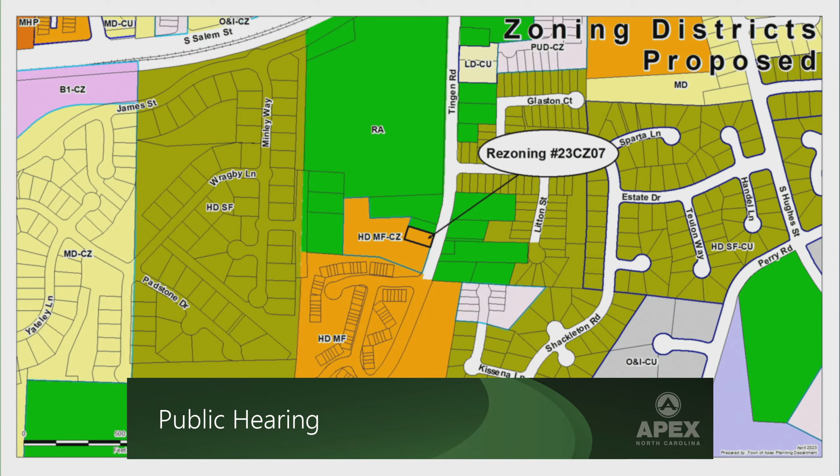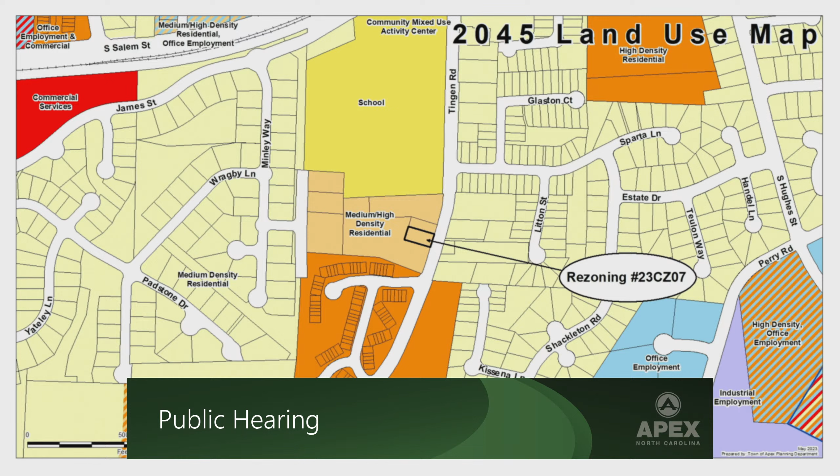The property is currently zoned residential agriculture. The applicant is proposing to rezone to high-density multifamily conditional zoning. The 2045 land use map designates the property as medium-high density residential. The proposed rezoning to HDMF is consistent with the land use map. The applicant conducted a neighborhood meeting on March 30th.

This rezoning was exempt from meeting with the Apex Environmental Advisory Board since the proposed rezoning is less than 1 acre. A full list of the uses and conditions can be found on page 2 of the staff report.

The applicant is proposing townhomes. I would like to point out that the zoning conditions are all the same as the adjacent rezoning to the south, except for condition number 11: the property shall be developed with the adjacent property to the south.

Planning staff can recommend approval because the proposed rezoning is consistent with the land use map classification and will expand the area available for affordable housing and encourage compatible development. Myself and the applicant are here to answer any questions you may have.

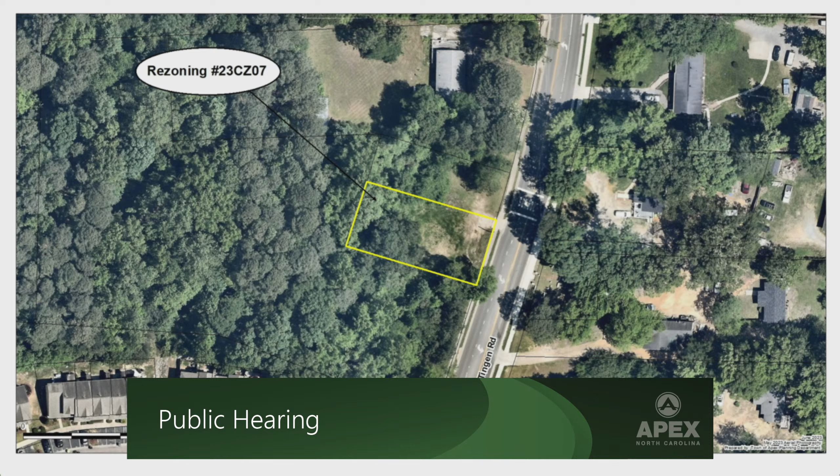Liz, I want to clarify one thing you said. You said staff can approve? Is that right, are you agreeing? Okay, yes, thank you. Any questions for Liz?

Does the applicant want to speak?

Good evening, Mr. Chair, members of the Planning Board, Jeff Roach, Peak Engineering and Design. Good to see you guys today. I'll be real quick here. This is exactly what we told you we were going to do in December.

The property owner was going after this 0.2 of an acre piece. He has now acquired the property, and we've already submitted the master subdivision plan for 100% affordable housing development on this piece, along with the 2.2 acres next door. So it will be a Habitat for Humanity, White Oak Foundation, something like that, that does pure 100% affordable housing.

So we followed staff. We are basically delivering on a discussion we had back in December with you, as well as the approval on January 10th from Town Council to support the project. I'm here tonight just to answer questions and tell you we're doing exactly the same thing that's happening next door, and we're back to say we did it. We acquired the property. So with that, I'll open up to any questions.

Yes, sir, Mr. Akers. Where are you at in the process with the parent tract, like without this?

We actually included this tract in the master subdivision submittal process. We made our submittal on May 1st for the master subdivision plan, and we'll get our first round of comments back the end of this month. Assuming it's approved here and approved by council the end of the month, the master subdivision and CDs will continue through the process.

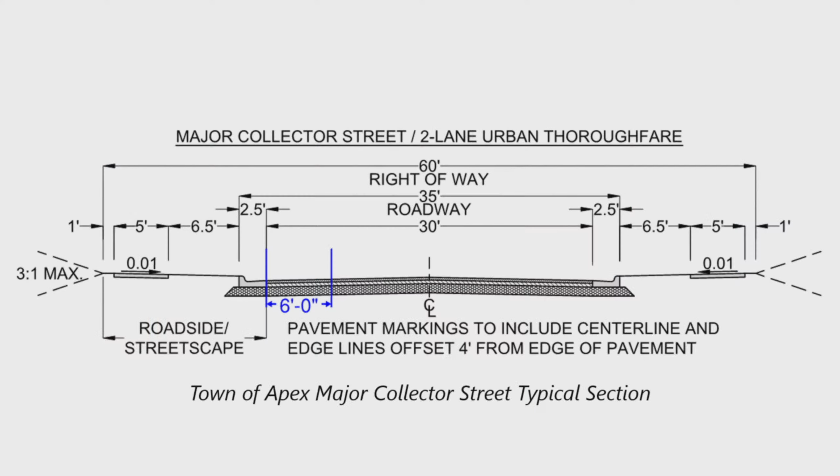Just to give you a visual of what's being asked for, this is the town standard. What's already been approved is removing the sidewalk here and this 2.5 feet of curb and gutter, and now what's being asked for is to remove this additional 6 feet. This line gives you an idea of how much more uneven that is over here.

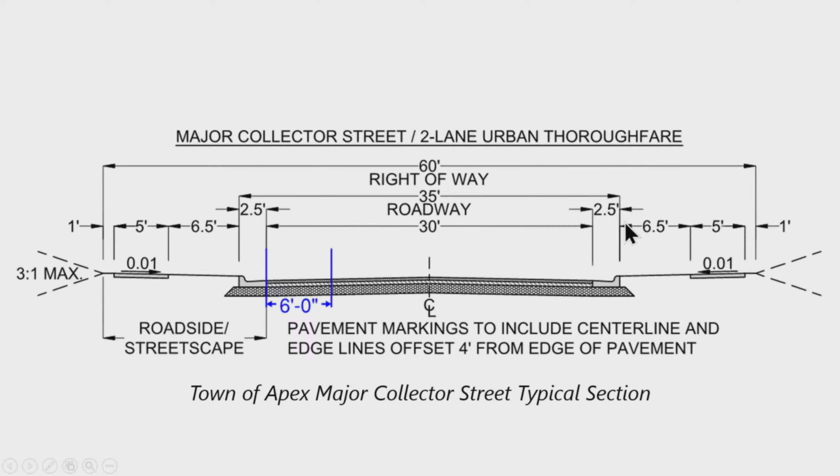The next proposed request is to increase the maximum allowed length of a branching cul-de-sac. The UDO already allows 2 cul-de-sacs sharing 1 point of common connection to be 1,200 feet long. The applicant, due to concerns about connectivity elsewhere, is asking for that to be increased to 1,450 linear feet. Staff doesn't have a problem with this.

There are no connection options to the south because of Army Corps land, and no way to connect to the east because of the American Tobacco Trail. There's also environmental stuff to the north that means they can't provide a stub street, so this will give them a little extra flexibility. The UDO section being called for is the one that gives flexibility in case there's an environmental feature that can't be crossed. Staff has no concerns about this one.

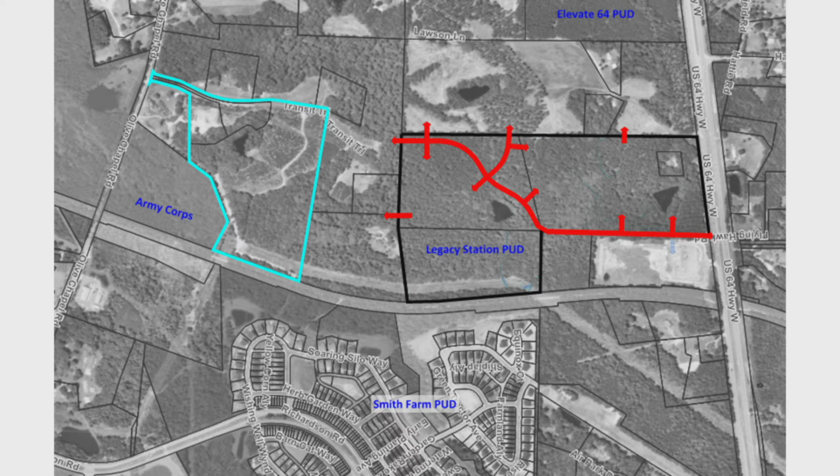As far as the Legacy PUD connection goes, when Legacy came in—I had to turn everything so it would fit, so north is over here on your right—Legacy is directly north of this property. As you may recall, this came in for apartments, and there's potential for a school site here.

The red shows the main road through the center and all of the access points that they proposed, including this one here. Our intent when we asked for this for Legacy Station was that it would eventually connect to the south and curve through there, to provide more interior connectivity between the different developments. If the condition we were just talking about, number 20, is approved, then that basically wipes out any potential for us to have that connection happen within Hatcher.

The most we could look for is if the Clement properties develop in the future, having that connection go this way, which is less optimal than having it connect through all three potential developments.

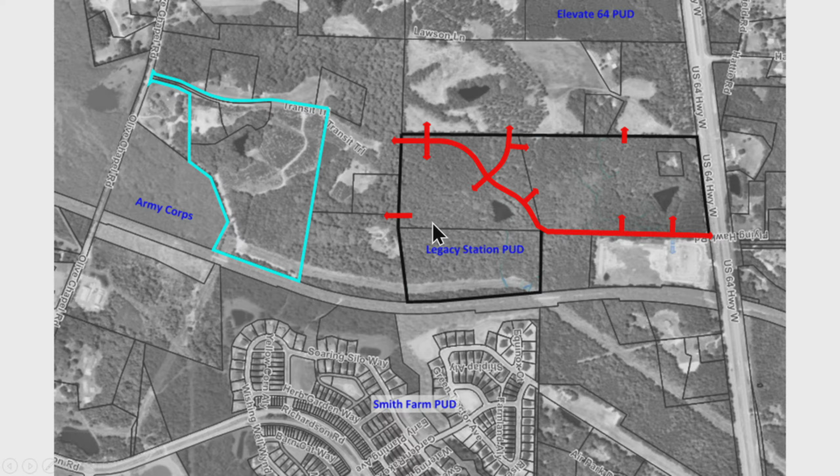As proposed, staff does not recommend approval of this rezoning. Instead, we recommend approval of conditions 4 and 19, and we recommend denial of condition 15 and condition 20. The applicant is here and is happy to answer any questions you may have, and I am also happy to answer any questions you might have.

Any questions for Shelley? Yes, I do. What was condition 15 as written and as approved with the prior zoning case?

Taking out the yellow text, it would read: the developer shall construct Transit Trail according to the Apex Thoroughfare and Collector Street plan on a 60-foot public right-of-way from Olive Chapel Road to the northernmost property boundary, to be dedicated prior to the first plat of subdivision.

The developer shall not be required to construct curb and gutter on the west side of transit trail. The east side of transit trail shall be constructed with curb and gutter and a 5-foot sidewalk from Olive Chapel Road to the entrance of the future master subdivision plan, and a 10-foot side path from there to the northernmost extent of the property.

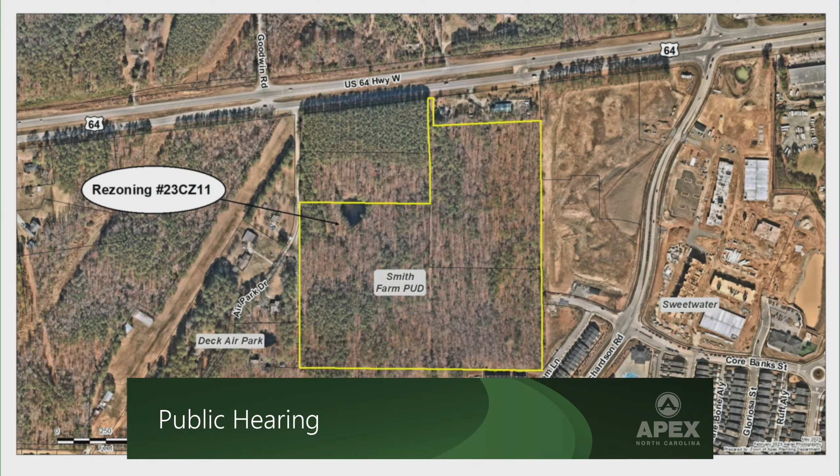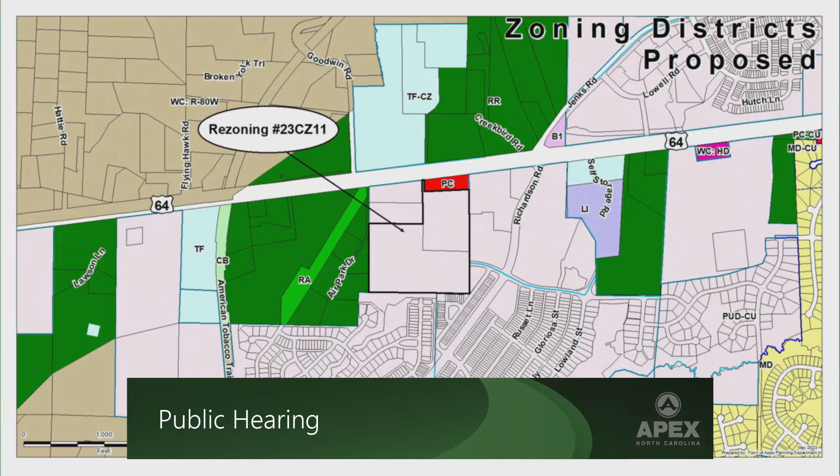So the existing zoning district is planned unit development conditional zoning. The proposed is also planned unit development conditional zoning. Since we're just amending it, we're not actually changing the underlying district at all. This is still consistent with the 2045 land use map that calls for high density residential, office, employment, and commercial services in the general area. And it's inside corporate limits.

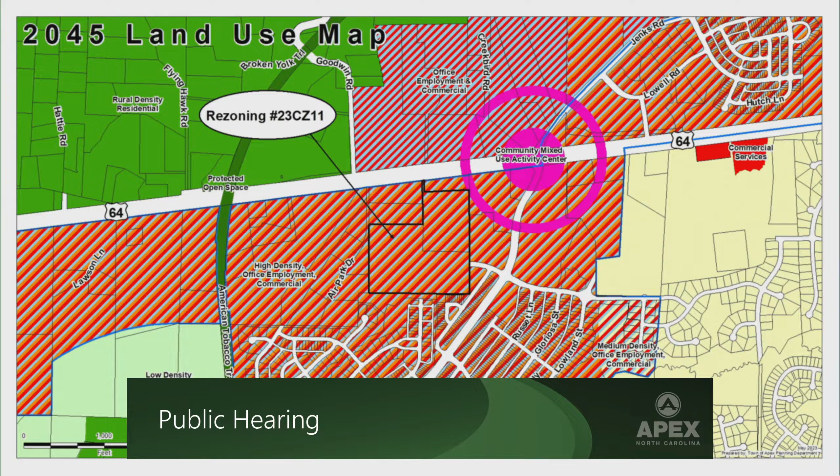So when this actually started with Sweetwater, Sweetwater's Phase 10 is all of this stuff right through here on the western side of Richardson Road, just south of 64, right where that intersection happens. Phase 10 is currently under review. Some pieces have been approved for work, but it's currently under review. During that review, staff was looking more closely, again our transportation folks, at connectivity, just like we were talking about a minute ago. Core Banks is located down here, that road is already connected, it already stubs out to the west. So we started looking at Ingold Drive, right through here.

Now, Ingold Drive is a private street. It's going to be part of the shopping center right there, and it's going to connect through. Staff was looking at this as a way to provide additional connectivity to the west towards Smith Farm, so that all of the traffic doesn't have to come through Core Banks, which is a relatively smallish road right there, and so that we wouldn't have pedestrians from way up here in this corner having to walk all the way across a fairly busy commercial section in order to access it.

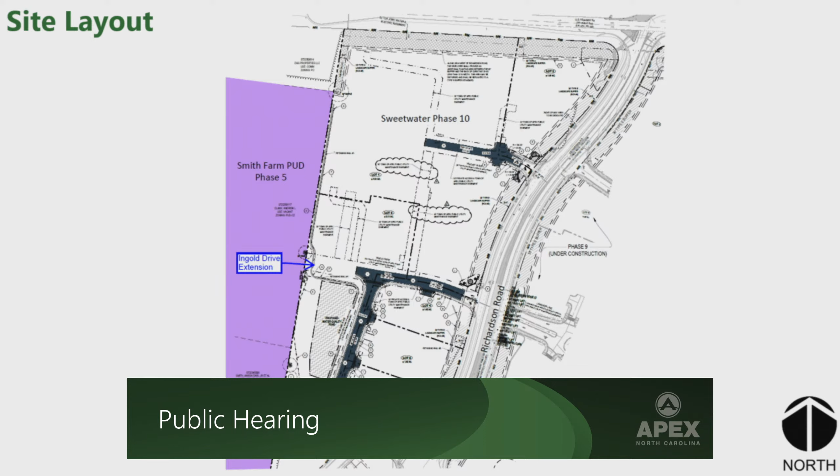So the applicant, the Sweetwater developers, have reached out to the owners of this portion of Smith Farm and have asked them to amend their PUD, and they've asked them to add the following language.

I'm not going to read the whole thing to you, but essentially it says that for these two particular parcels, because of some challenges, especially ones involving topography, the PUD will allow the eastern perimeter buffer to be graded. Each buffer will be replanted at the time of development and still count as RCA if a future land use requires such a perimeter buffer. The buffer will be in accordance with the UDO, and in no case shall it exceed 20 feet in width.

The seed and plant species used to stabilize the disturbed area and/or any replanting will be in accordance with the Town of Apex Design and Development Manual.

At this point, there's no proposed use for Phase 5. We don't have a development plan in front of us, so we don't actually know if there's going to be a required perimeter buffer between Sweetwater and Smith Farm. If another Sweetwater or shopping center comes in right next to it, there may not be a required buffer. But if somebody comes in with a different use that the UDO does require one for, they need to have this just to make sure they don't accidentally get messed up.

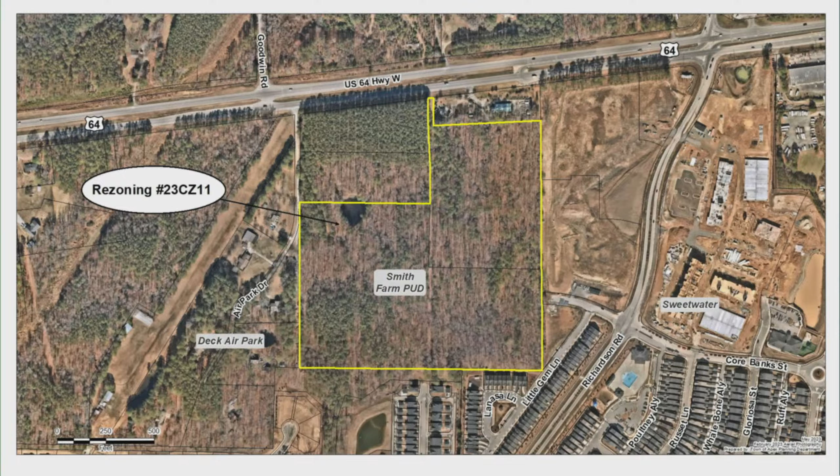This is not a removal of the entire buffer. This is just for allowing the grading and then replanting, but the buffer still remains there. We don't know that there will be one in the future because it just says per the UDO, so depending on the uses, but there's no change to what kind of buffer would be there. It's simply saying we're going to allow them to grade so we don't have a weird connectivity problem in the future and an even stranger looking retaining wall, and so that everybody can actually access things appropriately.

Thank you, Shelley. Did the applicant want to speak?

Good evening. Peter Cnossen, Jones Cnossen Engineering. We are the consultant engineer for Andy Clark as well as the Smith family on this rezoning.

Thank you, Shelley, for that presentation. I did get a kick out of it being a divot. I never heard that term before, but I loved it. But anyway, there's a natural draw basically that runs the property line.

In order for the retaining wall, as Shelley mentioned, it's over 20 feet high, and it basically, you wouldn't even be able to extend Ingold Drive because of the presence of that wall. In order to remove that wall, they're looking basically grade between the properties, and obviously that would require removal of the buffer. I've seen the grading plan from the Sweetwater design team. It basically, the grading is going to extend into the Smith Farm property anywhere probably about 40 to 50 feet, because it is about a 20-foot fill.

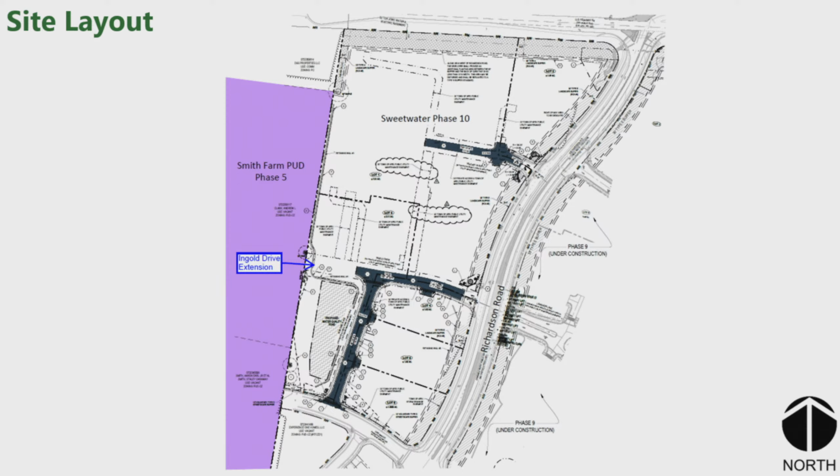Shelley, I want to make sure I understood the EAB's concerns and that they're heard and accommodated. The issue Peter's bringing up is that without a proposed future land development plan for the Smith Farm pieces, there's no way to determine what the use next door to Sweetwater will be, or what the buffer size or requirements will be. Until we have some kind of proposal for development on the purple piece, we don't know if it'll be a 10-foot buffer, a 20-foot buffer, or if it'll be required at all. If they put, say, a Food Lion behind the Harris Teeter, or another grocery store backing up against it, they won't have a buffer of any kind.

Did the EAB understand that? I'm just trying to make sure they understood. Their concern is that we have no idea how long we might be going without the ecosystem benefits of the trees that are currently there. If it's 5 years and no trees are planted in that area, they made it seem as though that wasn't as big of a concern for them, but they wanted the ecosystem benefits from additional trees as soon as possible. I think their determination was that it didn't matter as much to them if the developer was potentially out a significant amount of money by planting new trees back now, as long as we got those ecosystem benefits.

To be fair, that is what their board is tasked with reviewing. I think they intended for their recommendation to make clear that this is going to be planted back ASAP. But when they were trying to figure out the phrasing, there seemed to be a lack of clarity, and trying to wrangle everybody onto one path didn't end up with exactly the language we thought we were going to get. So some of them were fine with it just being planted back to a specific standard immediately, and some of them were fine with any kind of trees.

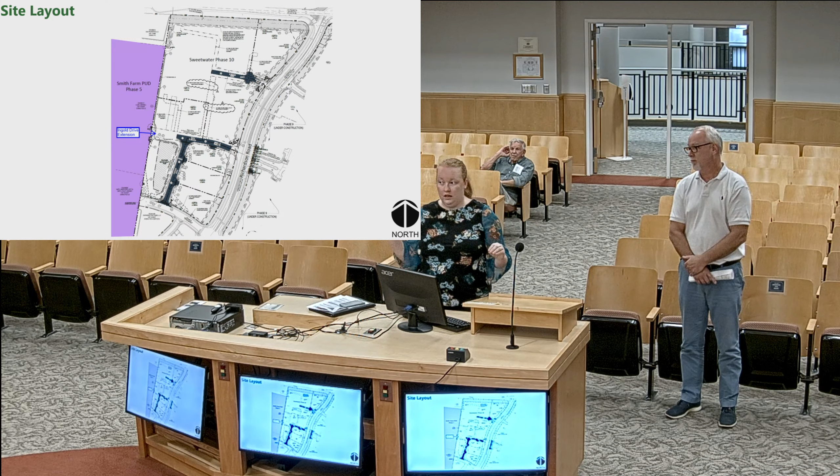I'm unclear, but that's helpful. I'd encourage them to be as clear as possible. Thank you for that. We can't work off of intent, we've got to work on what's written, so that would help.

Do we have anybody in the audience that signed in for this particular motion? All right, then I will bring it back to the board for discussion of the possible motion.

This one's easy. I'll make a motion to approve 23 CZ 11, Smith Farm Phase 5 PUD amendment, as presented by staff. I have a motion from Ryan. Do I have a second? I'll second that. All in favor of passing 23 CZ 11, say aye. Aye. Any opposing? All right, that passes unanimously.

On to new business, item 1. Michael wants to give us an update on the senior housing. Actually, this is a motion for proposed affordable housing incentive zoning.